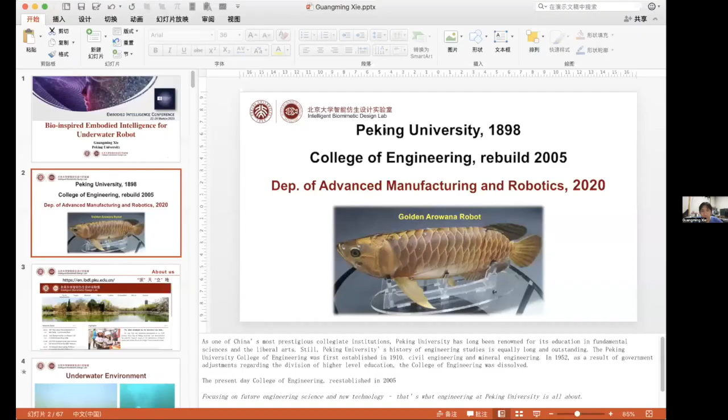I'm very glad to have the opportunity here to report our work on bio-inspired underwater robots.

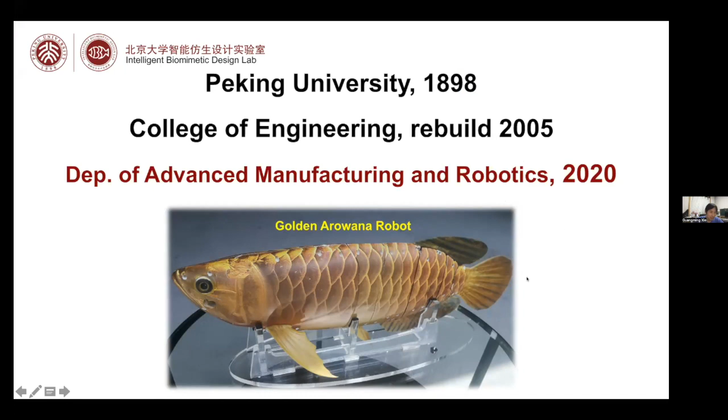First, let me give a brief introduction of my group. As one of China's most famous universities, Peking University has a long history, but the College of Engineering was just rebuilt in 2005. We are located in the Department of Advanced Manufacturing and Robotics, which was just built three years ago, making it the youngest department in our college. Here is a picture of a golden Arowana robot from our lab, and here is the website of my lab. Though the department is very young, our research on robotics has been ongoing for over 20 years.

My lab's name has three keywords. The first is intelligent—just like this conference, we think intelligence represents a research prospection, and as robots or machines become more intelligent, there is a long way to go. The second keyword is biomimetic; we think it represents a research paradigm. We believe nature is always a good teacher, and we can learn from it persistently, never out of date.

The last keyword is design. We hope our research results will be applied in the real world someday, which needs industrial design, commercial design processes, and so on. So scientific research, innovation, and real-world application are both what we expect. In Chinese, we say 顶天立地—that means we want our research to touch the sky, the edge of the research, and also step on the ground and solve real problems.

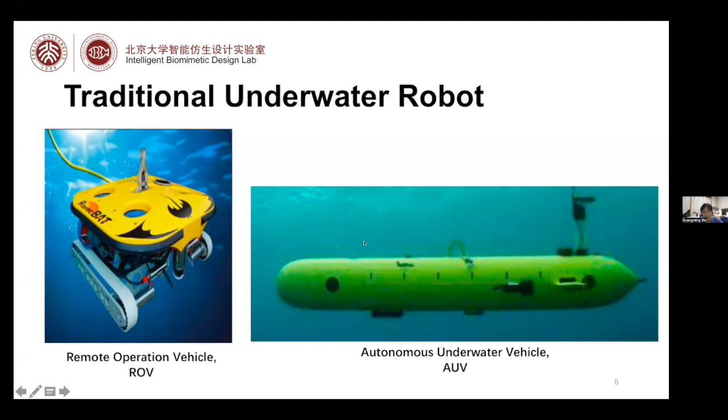But for these two kinds of traditional underwater robots, the main propulsion mode is propeller. So there are some aspects that needed to be improved, such as low energy utilization efficiency, insufficient mobility for robots, and also large interference with the environment, making the robot unfriendly to the environment. So the bionic robotic fish emerged as times require.

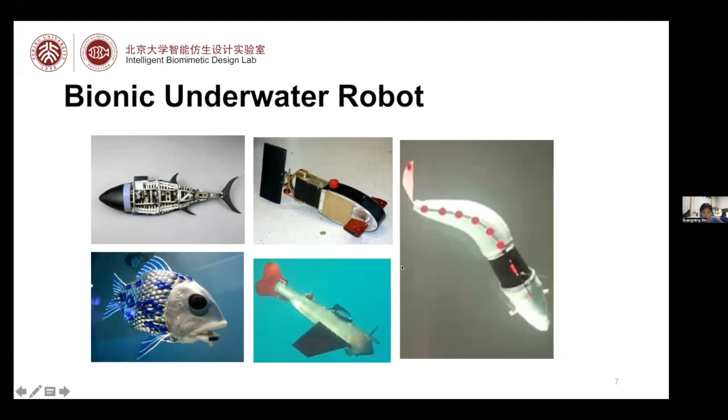So next, we'll introduce the work of our team from the following aspects, including motion, perception, communication, catching, school behavior, robot fish mix system, and two recent results of our group.

So the first is the motion bionics, and here we use this example, the boxfish. This is a paper from Nature 2015: a curious denizen of reefs, the boxfish flits among the corals, turning this way and that, and feeds on small invertebrates.

This fish has been used as the bionic model for an automobile company, but it does not seem to be hydrodynamically gifted because its swimming is neither swift nor effortless. This paper shows that the shape of this fish has self-stability, and also its fins give it high maneuverability in 3D environments.

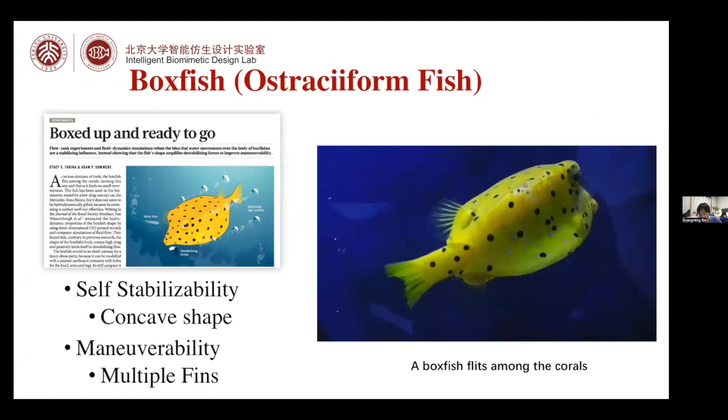So we think that this boxfish is a good teacher. We should learn from it. So we designed such a boxfish robot.

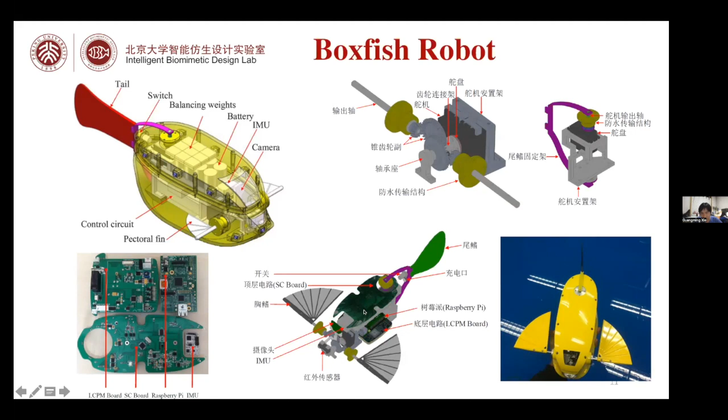We used 3D technology to get the same shape and design a pair of pectoral fins and a tail fin like this. The two pectoral fins and the tail fin are all independent. And to save space, we use such designs for the chips and devices.

We also based our design on the CPG, central pattern generator framework, to design the motion control architecture. This allows the boxfish robot to have 3D maneuverability.

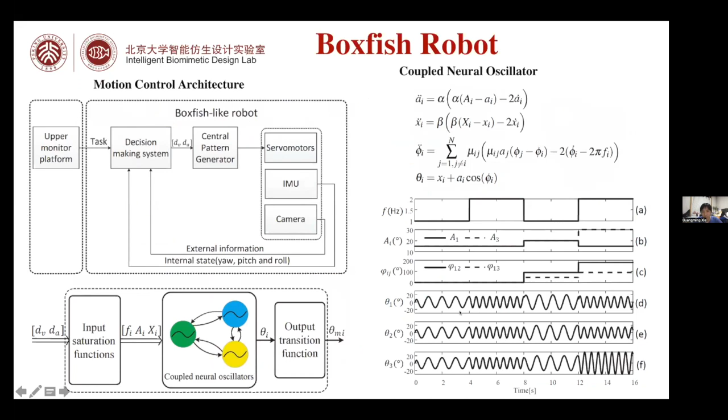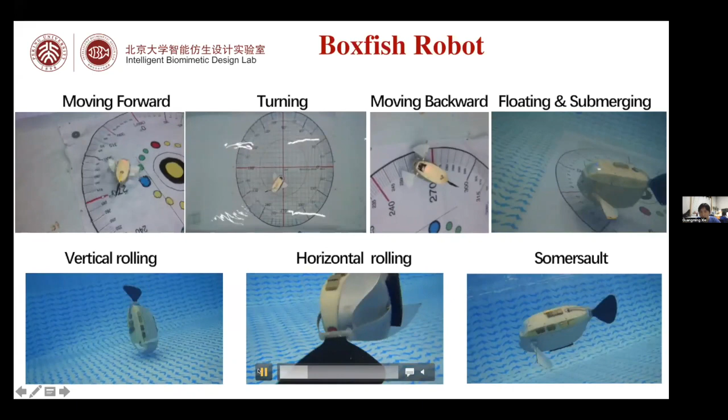For example, it can move forward, turn left or right, and move backward. Also, it can float and submerge. And with the pectoral fins, it can perform vertical rolling, horizontal rolling, and somersaults.

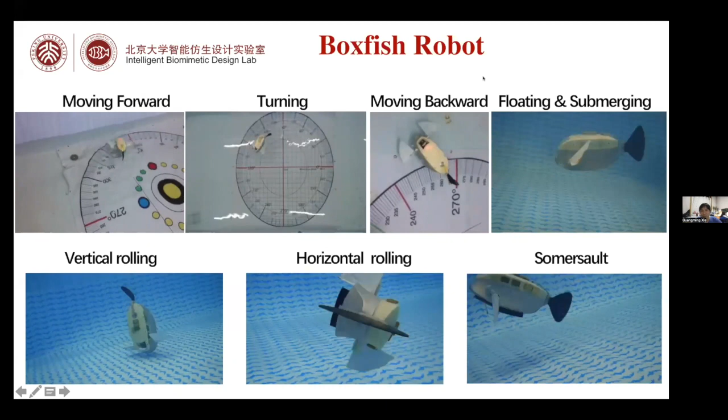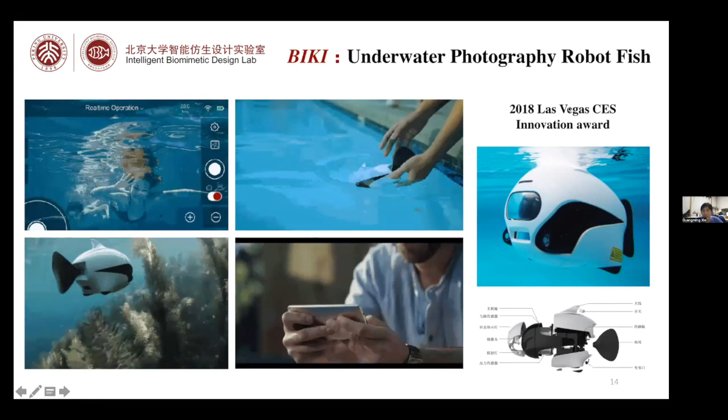Based on this prototype, one of my students designed a product for personal entertainment. It's named BIKI, an underwater photography robot fish. When you play or do some activity in the pool or sea, you can take this robotic fish to follow you and take pictures for you. This product won the Las Vegas CES Innovation Award, and it's based on our boxfish robot.

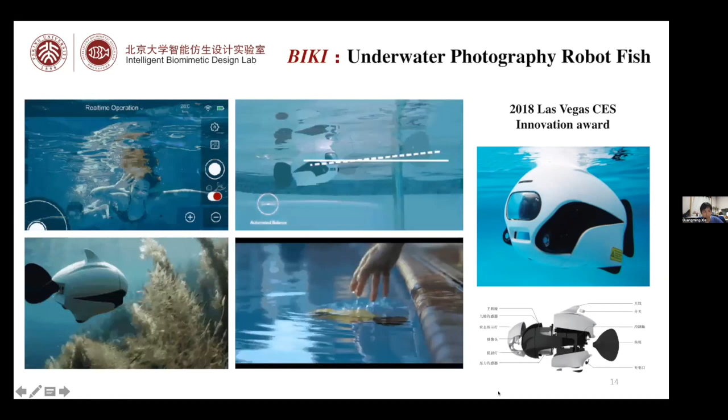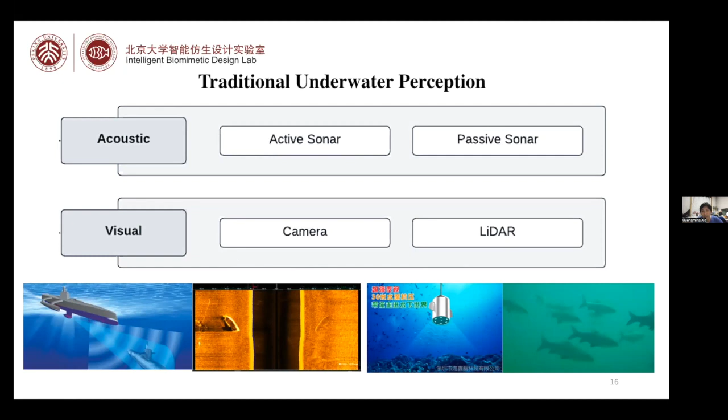The next topic is perception bionics. We know that traditional underwater perception has two classes. First, acoustic, using active or passive sonar, but the information from these devices is very limited. Second, visual, using camera or lidar, but when the water is turbid or the light is dim, the information is also not enough for underwater environment perception.

But we think that fish also face the same bad environment. So how does the fish solve this problem? We found that fish have the lateral line system, a unique perception organ for the underwater environment. It consists of flow-responsive receptors distributed all over the body, and some of them on the surface.

Based on this lateral line system, the fish can perform very important behaviors, such as rheotaxis. It can sense obstacles, find predator localization, and also find its colleagues, allowing the fish to form a group, and even harvest energy from the vortex street following another fish. So it's a very important perception system for the fish.

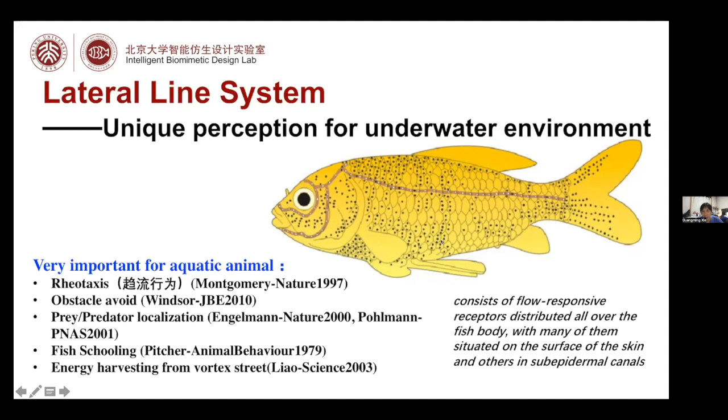So we wanted our robotic fish to also have such an underwater perception system. We use pressure sensors: 9 in total, 3 on the left, 3 on the right, and 3 on the face. We use these 9 pressure sensors to compose an artificial lateral line system.

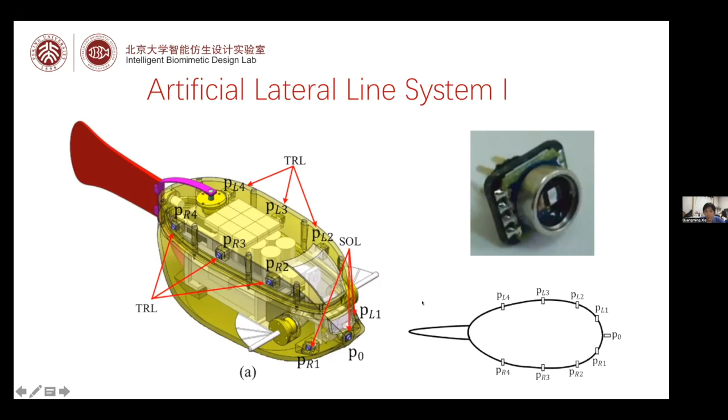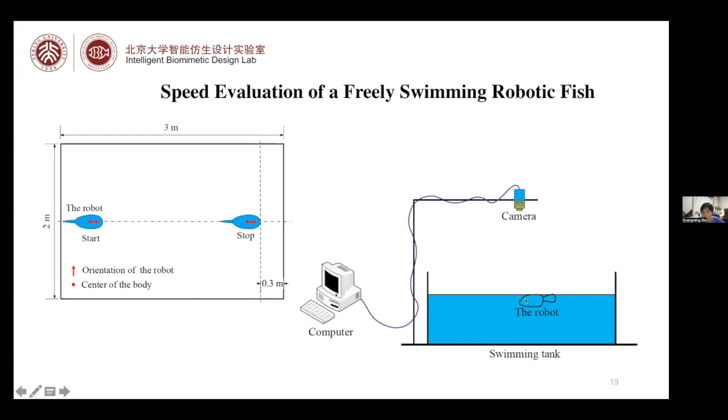Based on this, we can perceive some information. The first is speed self-evaluation for a freely swimming robot. Here we use a tank environment and a camera to record the speed of the robot. This robot fish has the artificial lateral line system, so we can record the pressure data for the robotic fish.

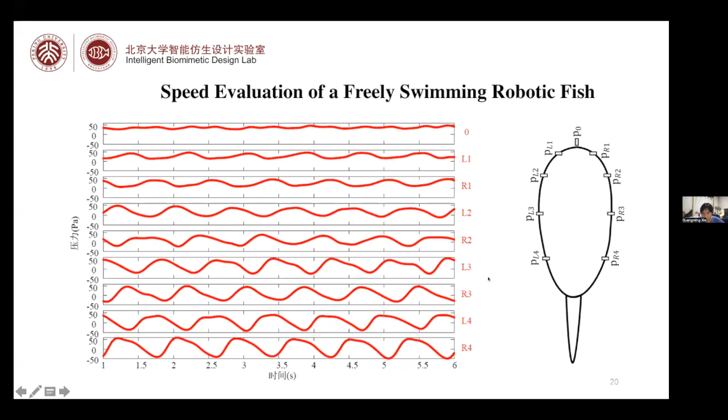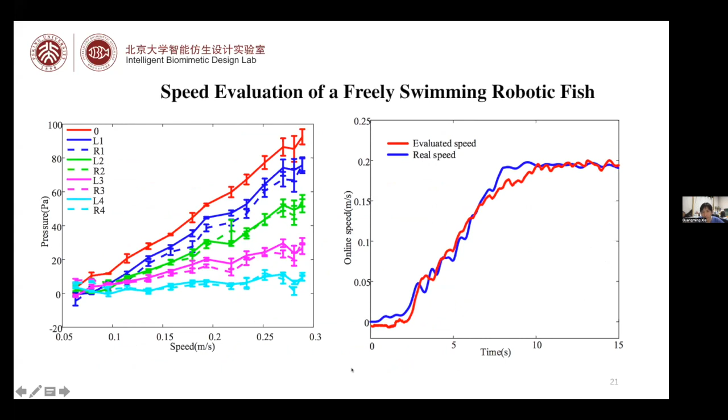Different pressure sensors have different records. Based on these pressure sensors, we can evaluate the speed. We can see this picture: the blue line is the real speed computed by the camera from the video, and the red line is the evaluated speed from the lateral line system integrated on the fish body. The error is very small.

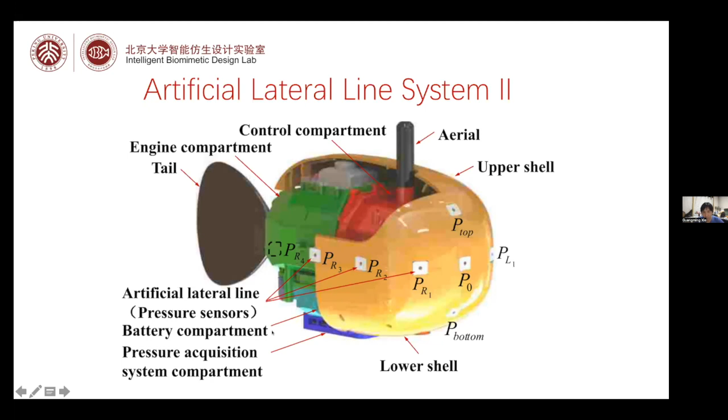Moreover, we developed the second artificial lateral line system. Not only this array of pressure sensors, we use 2 more sensors on the top and bottom. Based on these 2 sensors, we can evaluate the motion trajectory of the robotic fish. Here is the main result for this artificial lateral line system. We can use the system to give online state estimation, including the linear velocity, angular velocity, motion radius, and trajectory.

The method has three parts. A corresponding pressure variation model that links motion parameters to the pressure variations surrounding the robotic fish is built. Then a linear regression analysis method is used for determining the model parameters. Finally, motion parameters can be estimated by solving this PV model inversely.

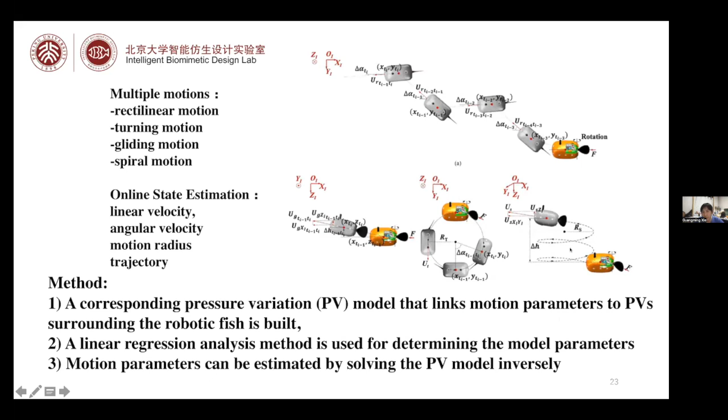Here shows different motion processes. Some are in 2-dimensional, and the last is in a 3-dimensional environment. Here is a video showing how the artificial lateral line system works.

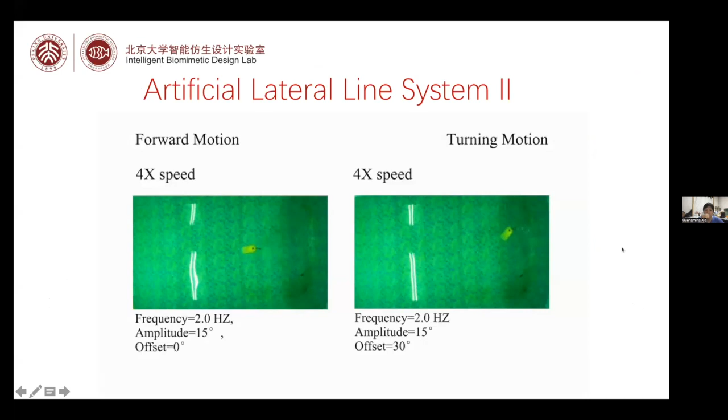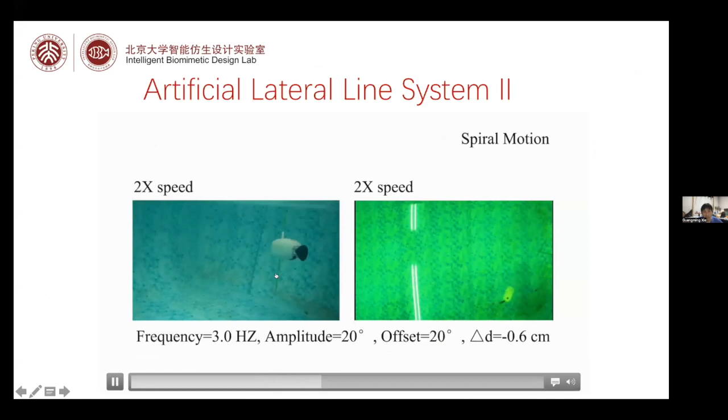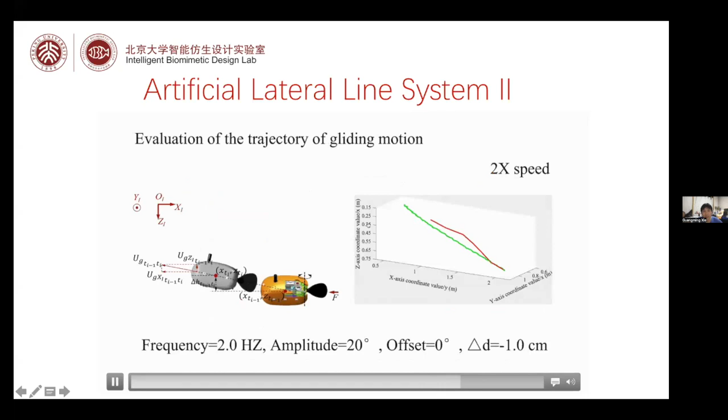Using different motion parameters, the fish can swim in the tank. Then we can evaluate the trajectory of the turning motion like this. This is the gliding motion. This is a spiral motion.

I think this is the first paper that uses this artificial lateral line system to give online state estimation of a fish-like robot.

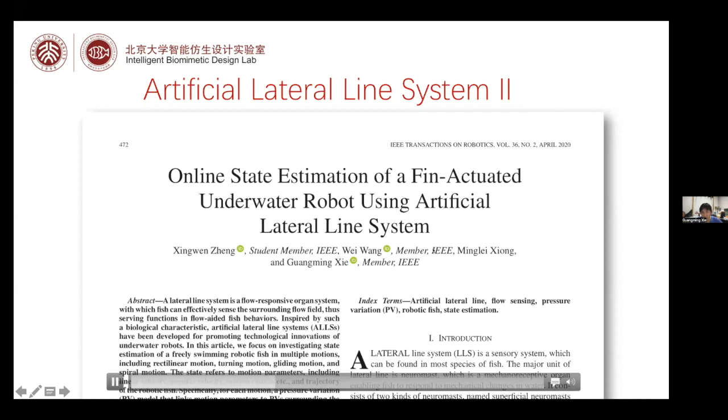Moreover, we not only estimate the state of the robot fish itself, we also want it to be able to sense the neighboring robot. This means here we have 2 robots. The first is just a swimming robot, and the second has the artificial lateral line system integrated. Once the swimming robot moves or swings its tail fin, the second fish can collect data from the artificial lateral line system. This is the swimming robot and the sensing robot. We want, based on this data, to estimate the distance between the 2 robots.

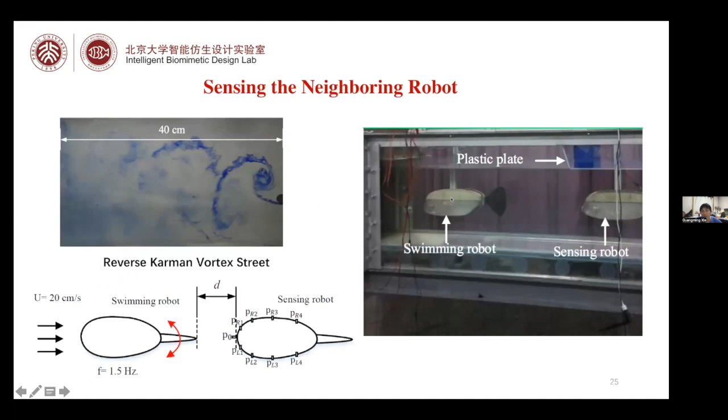This is the perception bionics. The next is communication bionics. Communication is one of the most fundamental capabilities for underwater robots in real applications. When an individual robot is executing an underwater assignment, the remote control center should monitor the state of the robot and implement necessary intervention if necessary, through underwater communication. In addition, when a group of underwater robots are performing collaborative tasks, such as patrolling seaports, searching, and monitoring oil spills, they need to communicate underwater for information relay, motion coordination, and formation control.

The widely used electromagnetic methods, well established for digital communication in the air - for example, 5G technology is very popular in China now and in the world - it can hardly work. This electromagnetic method can hardly work underwater.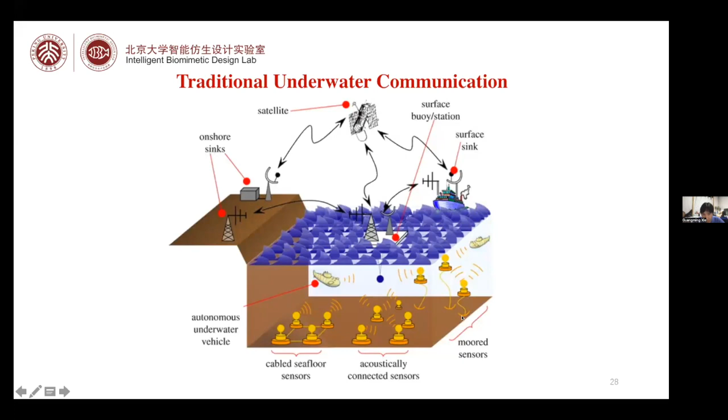So how to solve this communication problem for underwater robots? We also get the answer from nature. We found there is a class of fish called weakly electric fish. This fish can generate a dipole-shaped electrical field to perceive natural electric stimuli, which is called electric sense. The electric sense is used in electrolocation and for electrocommunication.

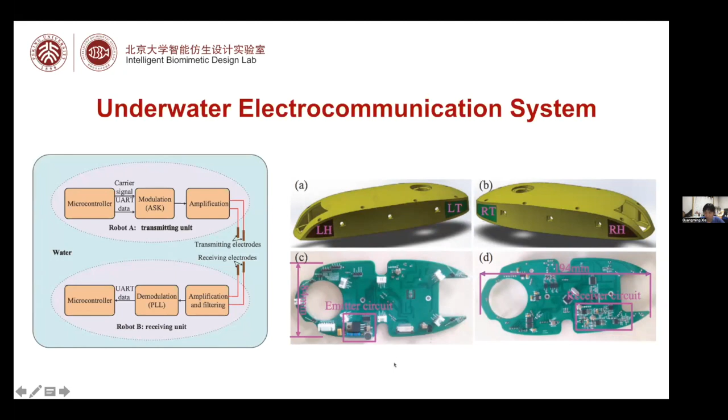Here's a video showing the experiment. There are two robotic fish, one is the leader, the other is the follower. The leader sends commands by this electric communication, to start and swing up over the obstacle. In the whole process, the leader sends commands to the followers just by this new underwater electric communication technique.

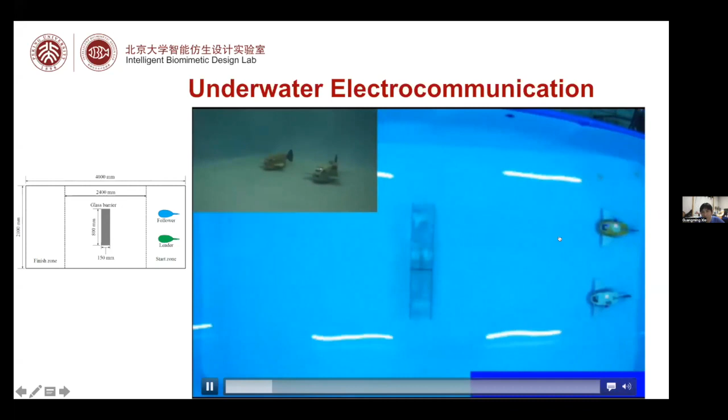In this experiment, the distance between the two robots can only be 3 meters. It's very short. Now we want to update the hardware system and the control protocol, the communication protocol, to enlarge the distance to 10 or 20 meters.

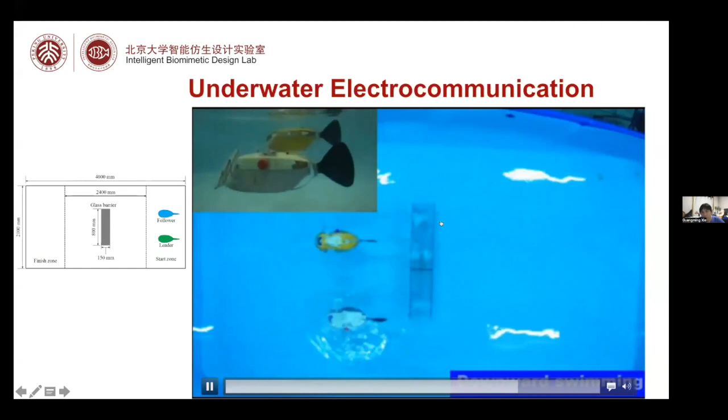Moreover, based on this underwater electric communication system, we can also do networking tasks. We use classical CSMA-CA-based communication mechanisms on the data link layer to solve the collision problem, and then we developed an ad hoc on-demand distance vector-based routing protocol on the network layer for complex multi-hop underwater electric communication networking.

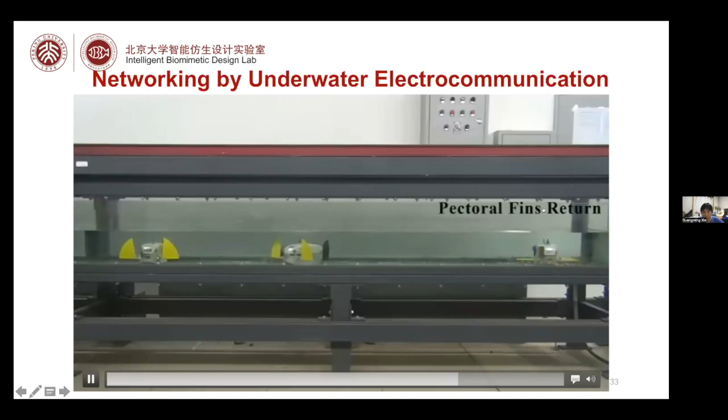The next is catching bionics. You see, the big fish usually eats small fish. The fish can open its mouth and suck the small fish into its mouth.

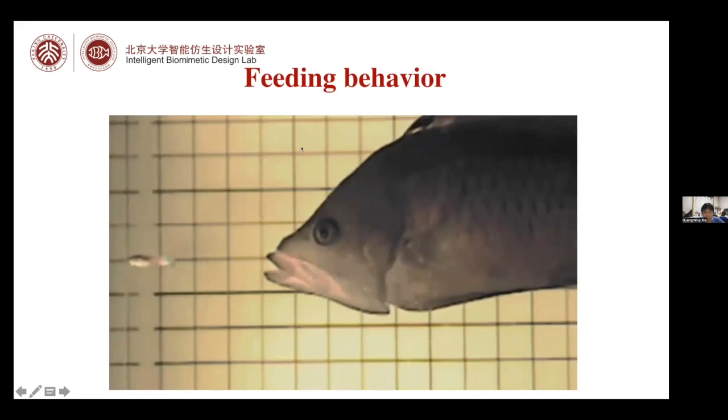We want to construct such a robotic fish mouth, but it's not easy. Here we just used such a basic result, but it's too large, we cannot integrate it into our robotic fish. So we found other animals that can catch animals or objects more efficiently.

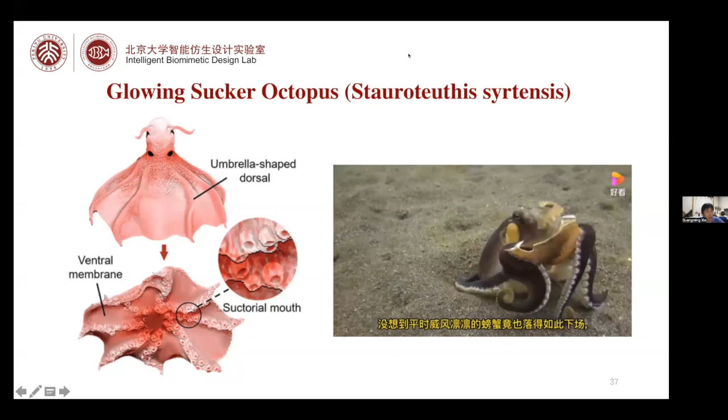The dorsal and ventral membranes - this is an octopus. It has dorsal and ventral membranes covering most of the arm length as it grows. This octopus can use these arms to catch living animals, by preventing the animals from escaping through the gap between the arms and increasing the grasping friction.

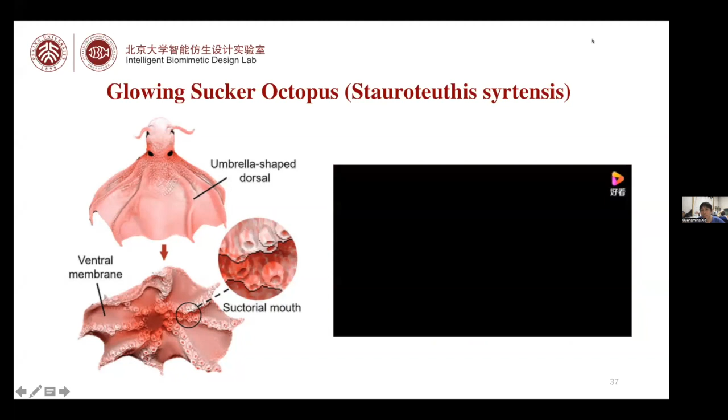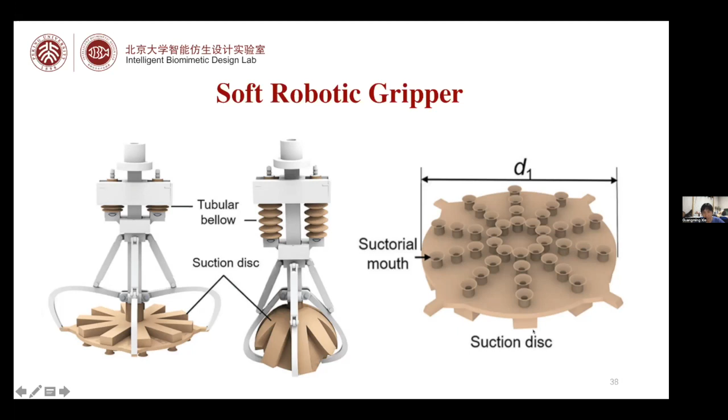Inspired by this predation behavior of the octopus, and benefiting from 3D printing and casting technology, our group developed a novel soft gripper with a similar geometrical structure and grasping ability to this octopus.

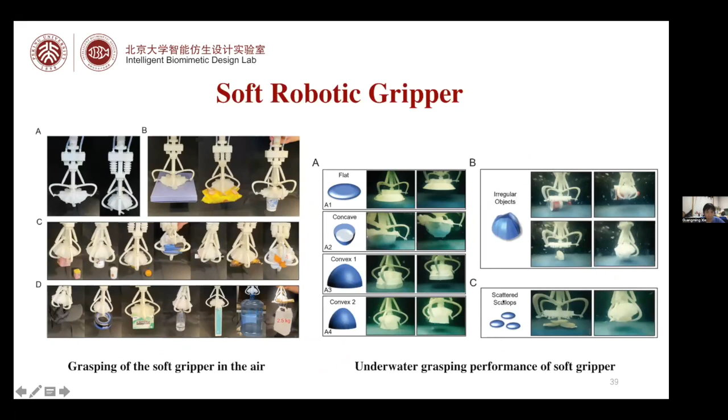This is the soft robotic gripper, and it features excellent abilities to suck and grasp objects of any shape. Here is the grasping behavior in the air, and here underwater. From these two videos, we can show that this gripper can be used to catch a goldfish or a turtle without harm - the fish is also safe. So this is our soft robotic gripper.

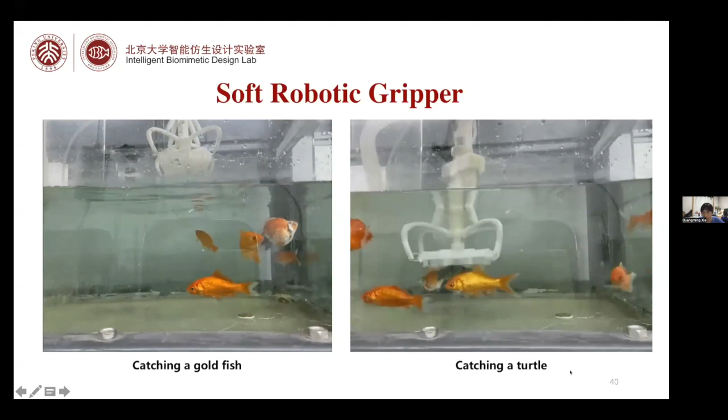The next is school behavior bionics. We're familiar with fish schools. Based on schooling behavior, fish can fight predators, and it also increases the probability of foraging. So from biology to engineering, we want to find the basic law for fish schooling.

Here is the famous model, the Couzin model. Since we have robotic fish, we use the same law - that means we use only local interactions between the fish in the group, which can produce orderly behavior at the group level. Here is a video showing that using the same law, these three robotic fish can achieve the same fish schooling behavior.

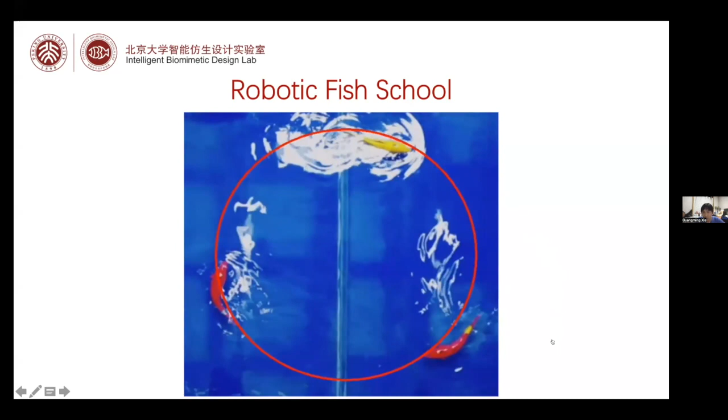The next is the robot fish mix system. It's very interesting.

This picture was taken about 10 years ago. We were just testing the performance of the robotic fish, this black one, in the lake on our campus. But we found an interesting phenomenon: the robotic fish swam ahead, and then many real fish in the lake followed the robotic fish.

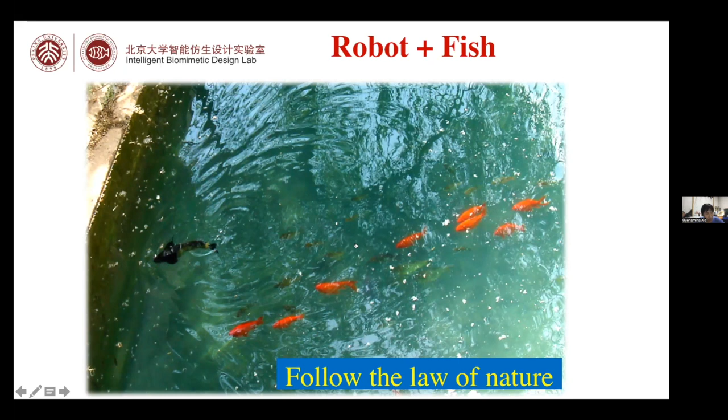This made us wonder whether we can use robotic fish to control or influence real fish. Real fish are more willing to accept this control mode. We think this is a way of following the law of nature.

Here's a potential application. Nowadays, when we build a dam, we also need a fishway, just like this. Here is the upstream, the downstream, and here is the fishway or fish ladder. It's necessary because this device is designed to let fish pass around the dam from downstream to upstream, because the fish need to continue upstream to spawn. If we don't have such a fish ladder, the fish cannot go upstream and will perish. This is a real picture of a fishway or fish ladder.

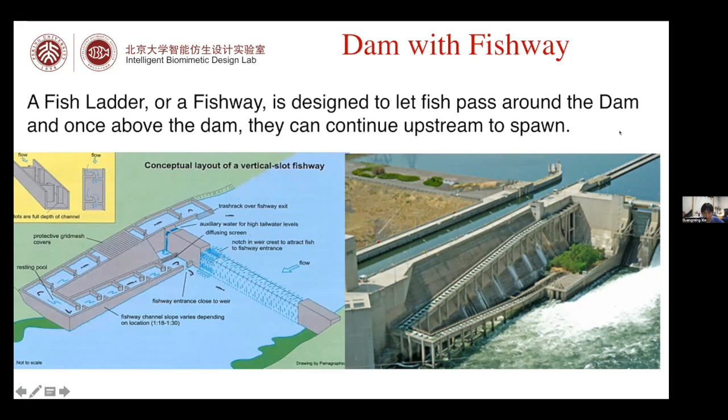But in fact, the river is too wide, and it's difficult for the fish to find the entrance of the fishway. So we are cooperating with experts in the field of water conservation engineering to study the possibility of using robotic fish to guide the real fish.

We taught them how to control this big robotic fish, and then they bought or caught some fish from the river and did some experiments. They showed that the real fish can follow the robotic fish for a long time. Here is a video record of their experiment. So the fish is our teacher. Now or in the future, we may help our teacher.

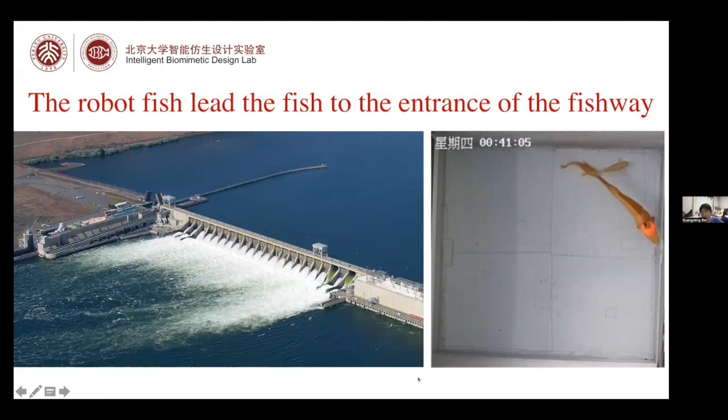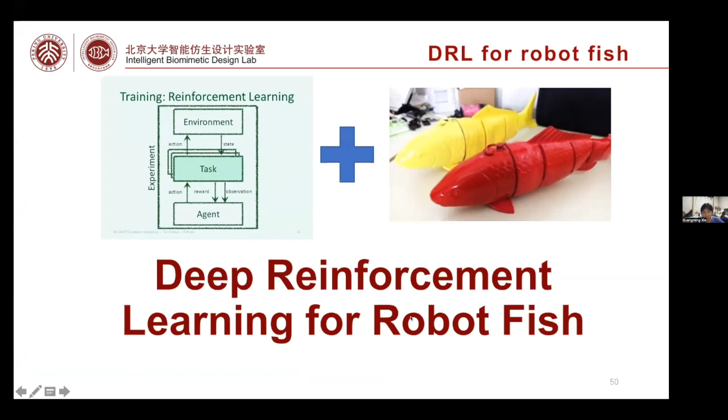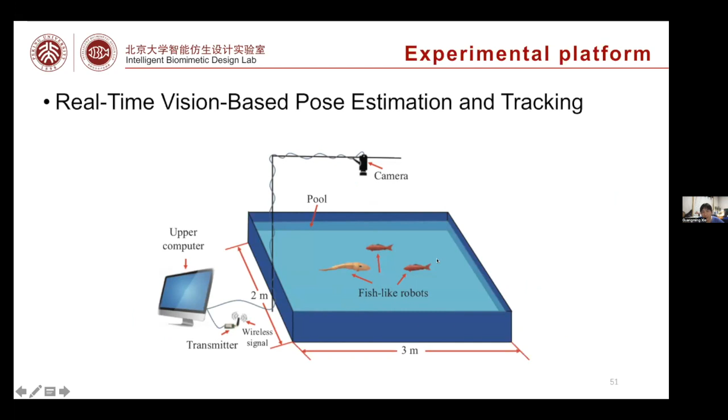And then we have two recent results. The first is that, as we all know, deep reinforcement learning is very popular for robotics, and we also want to use it for the motion control of robotic fish. First, we built a global vision-based pose estimation and tracking system. Using this experimental platform, we can ignore the error from the sensing system and get the exact position and heading of the fish, so we can just focus on the control part.

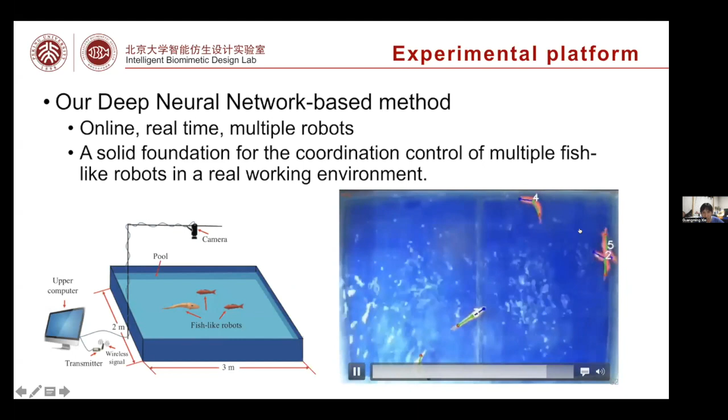Here we use a deep neural network to get the exact position. And then we designed a general learning framework: training in simulation and then deploying in the real world. These are 3 steps. The key step is creating the simulation system, which has 2 parts. The first part is the surrogate environment, based on experimental data from the physical fish-like robot.

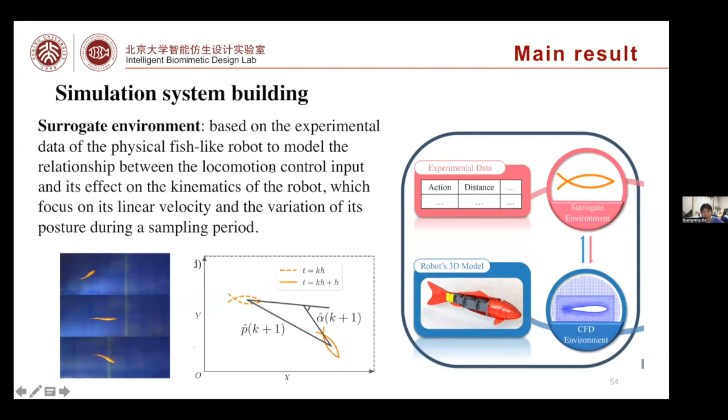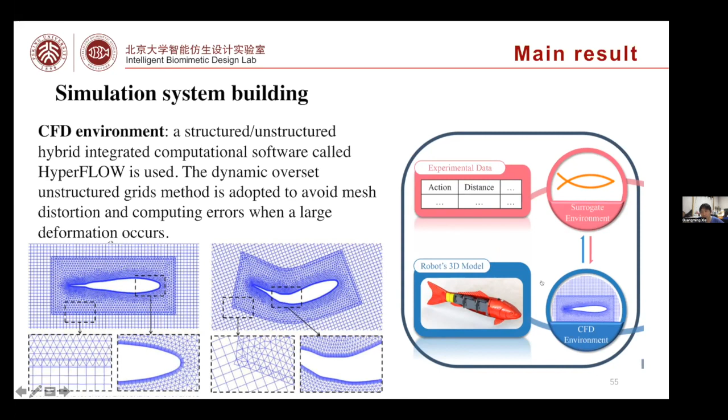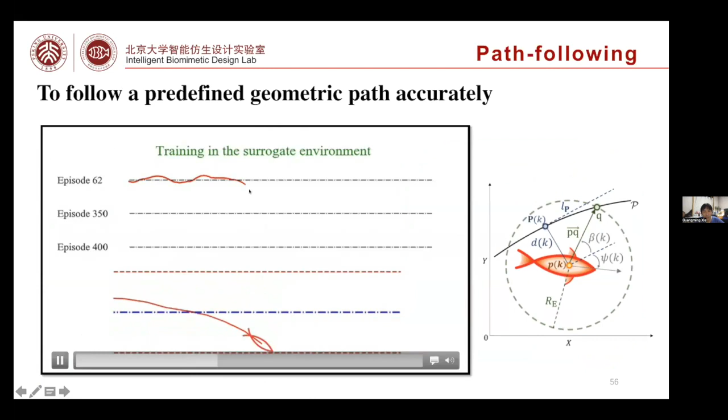The second part is the computational fluid dynamics, CFD, environment. We use a special software called HyperFLOW from our colleague, and we can get the exact solid and flow interaction. Based on this framework, we train the fish. First, we train in the surrogate environment, which is very fast, and after some episodes, we transfer to the CFD environment.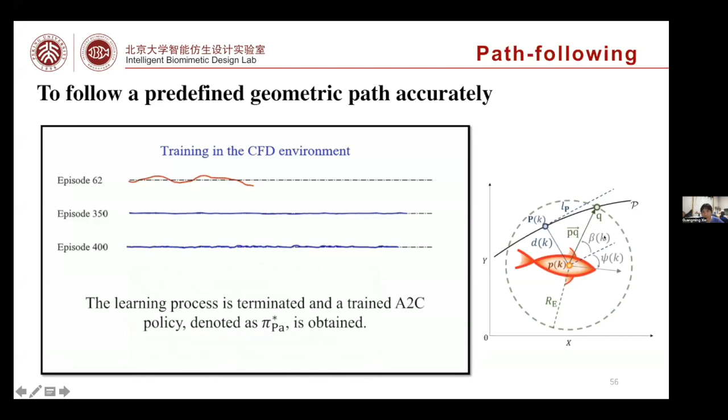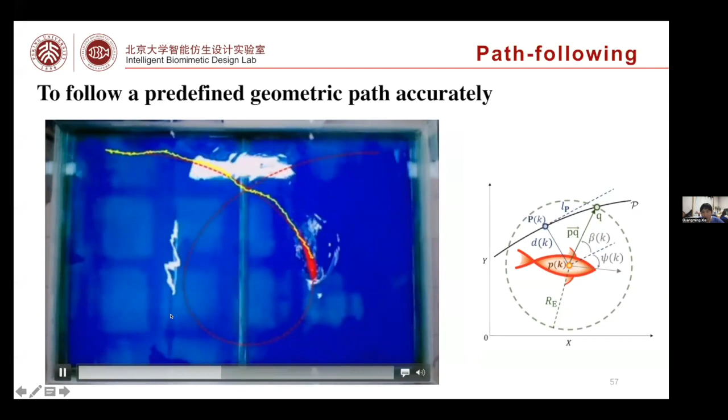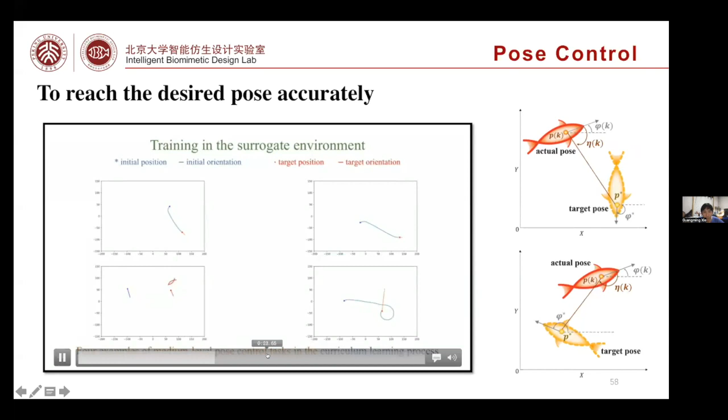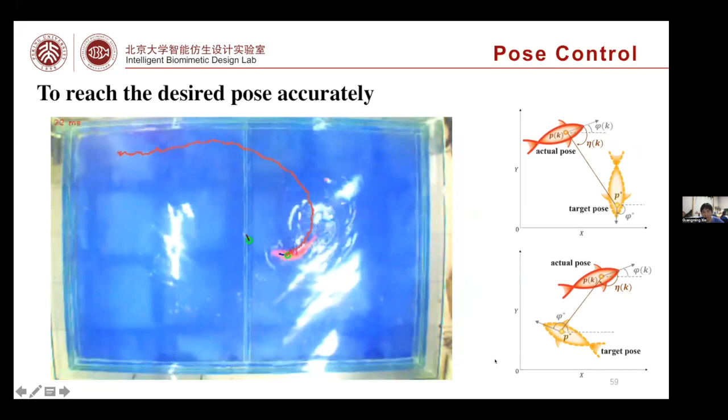Here the target is to let the fish follow a geometric path accurately. This is the result: here is the trajectory, and the fish can finish the task efficiently. Similarly, we get the pose control. Pose control is more difficult than trajectory following because two objectives must be achieved: first position, second heading. We used the surrogate environment for training and got this result. This paper was published 2 years ago.

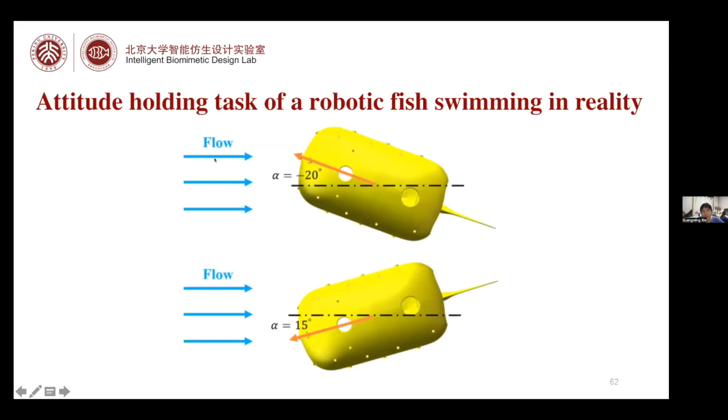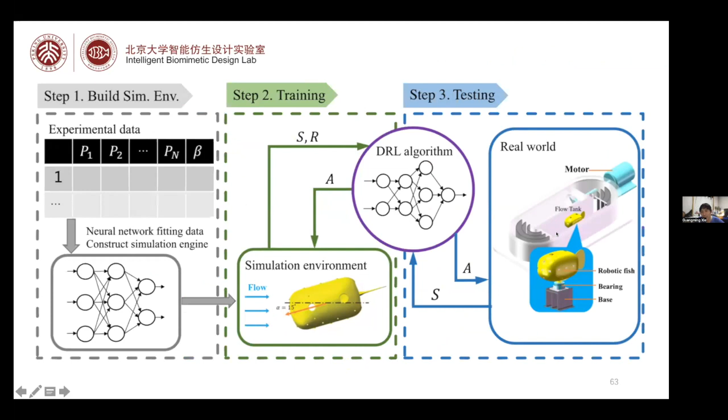We also used this DRL method with our artificial lateral line system. In this case, the task is a little simpler: an attitude holding task for robotic fish swimming in an unknown flow velocity environment. Again, three steps: build the simulation environment, train, and then test it in the real world.

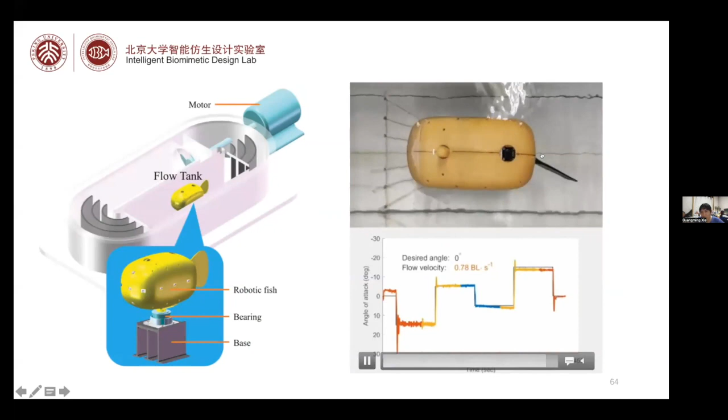Here we use this equipment, where we can control the speed of the water flow. When the flow velocity changes, the fish can sense the change of the flow and then change its tail control to keep the expected angle.

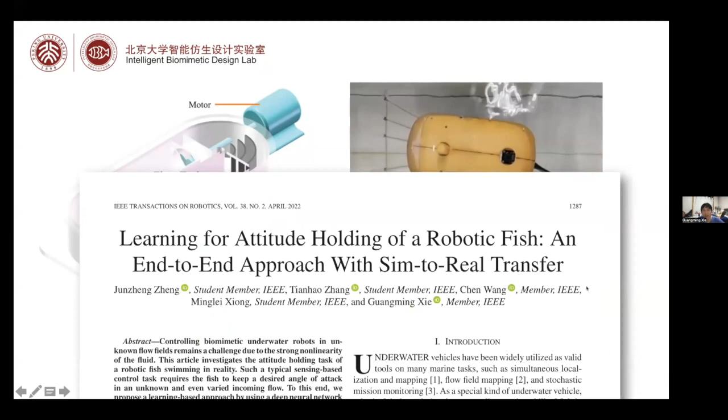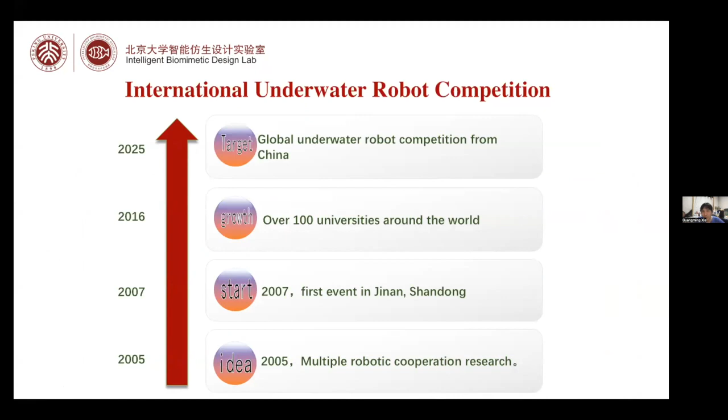And also, this paper was just published last year in Transactions on Robotics. Okay. The last thing is the international underwater robot competition, and now about 300 universities in China participate in this event. So you are all welcome to join this event. We have fish-based water polo games, and also garbage collection. So the event has a lot of types. Okay.